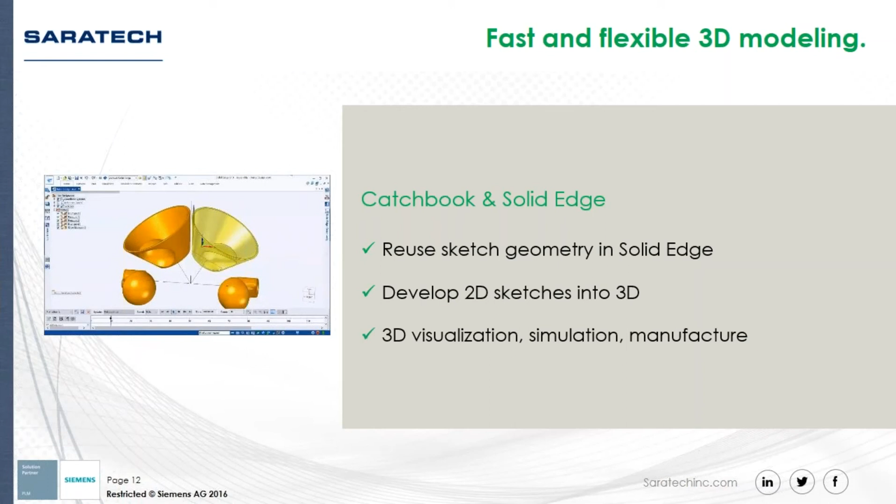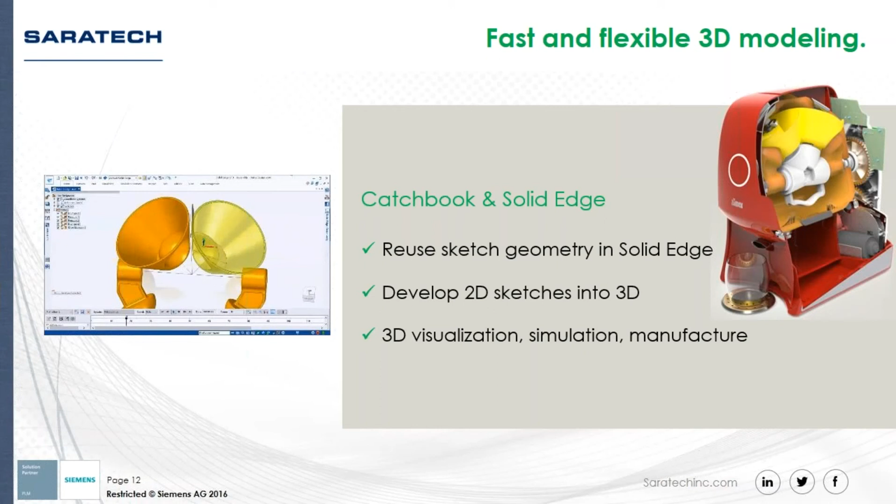So whether you're new to CAD or established, this is a great new way to let your company grow into things like 3D visualization, simulation, and manufacturing. And the finished product here, by the way, is the Soul Tabletop Juicer designed by Zumex. This new approach makes art and engineering design pretty easy and even fun.

Now let's move on to the unique power of Solid Edge Synchronous technology. You definitely should be familiar with it - it's a design approach that's all about combining the speed and simplicity of direct modeling with the flexibility and control of traditional history-based parametric design.

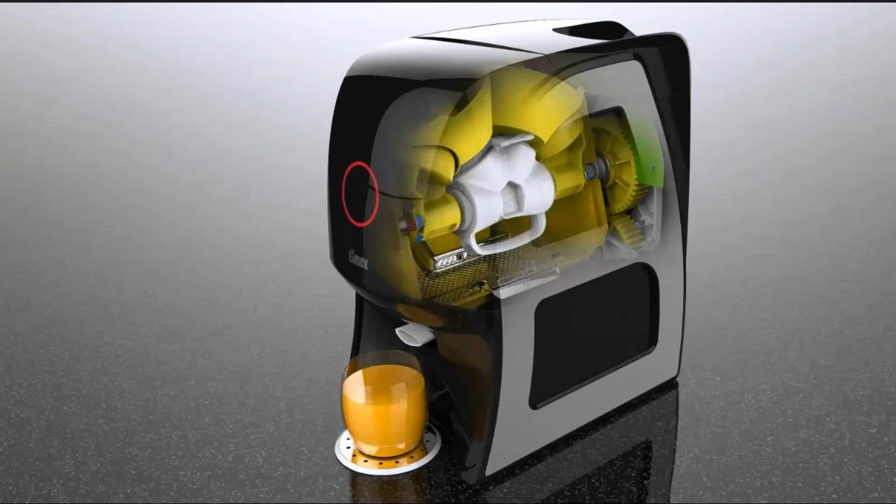Here we're going to work with this Zumex Soul Juicer to show off not just synchronous, but the ability to use both synchronous and ordered together for a hybrid design. Now here, this gear housing's handle was made as an ordered loft, but the mounts on each end were done as synchronous features.

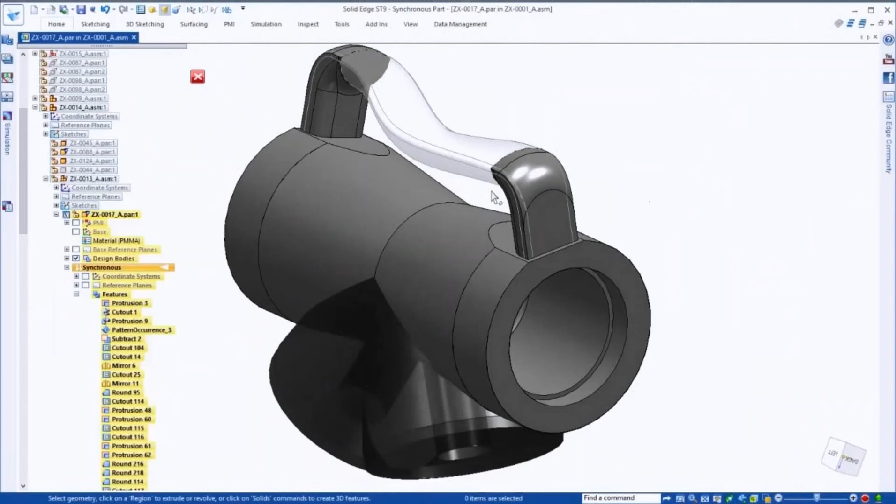So let's say we need to straighten out this handle. You can see it's a little bit crooked. So we'll change the synchronous mounts and see how the ordered handle reacts. Notice as we scroll back and see these synchronous features and modify them, we can still see the ordered loft in the middle in a ghost translucent mode.

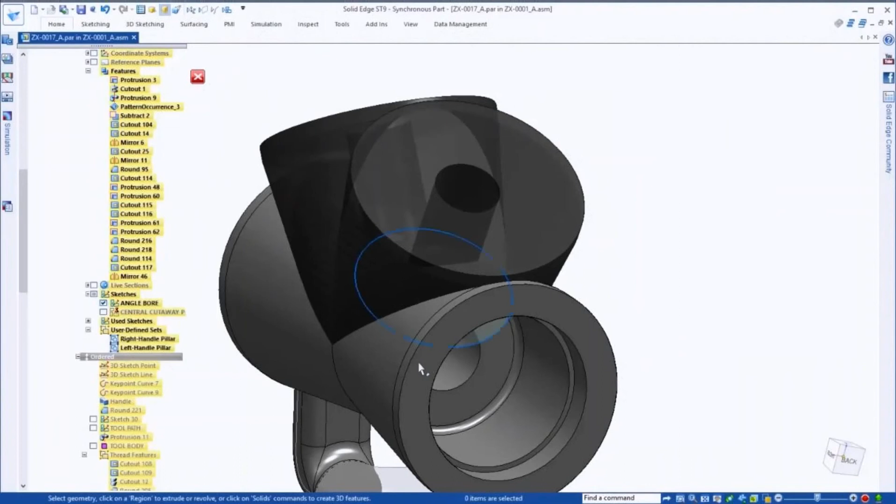This is a huge enhancement. There's no more flipping back and forth between the two modes and guessing on how the changes are going to look when you're done.

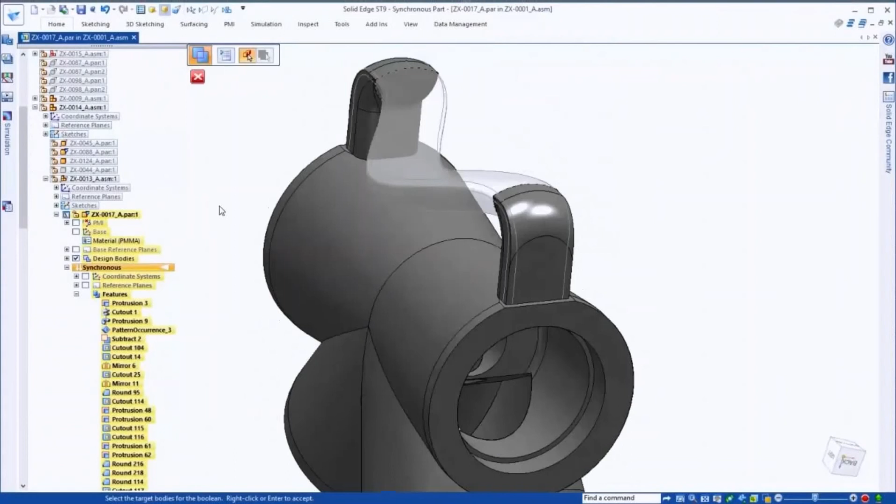Multi-body modeling is another powerful tool that's a lot better in ST9. With one step, you can add cuts to multiple design bodies, as you see here, whether they're active or inactive. And even if you go ahead and mirror these cut features, they actually remember what bodies to cut. This is really intuitive and smart and saves a lot of time.

Next, there's also a 3D sketch point that's been added. This was actually used in the lofted handle between the two end mounts, as you see. And we just aligned the two ends, but now we need to move that 3D sketch point exactly in the middle. So we just simply zero out the X and Y values to center that.

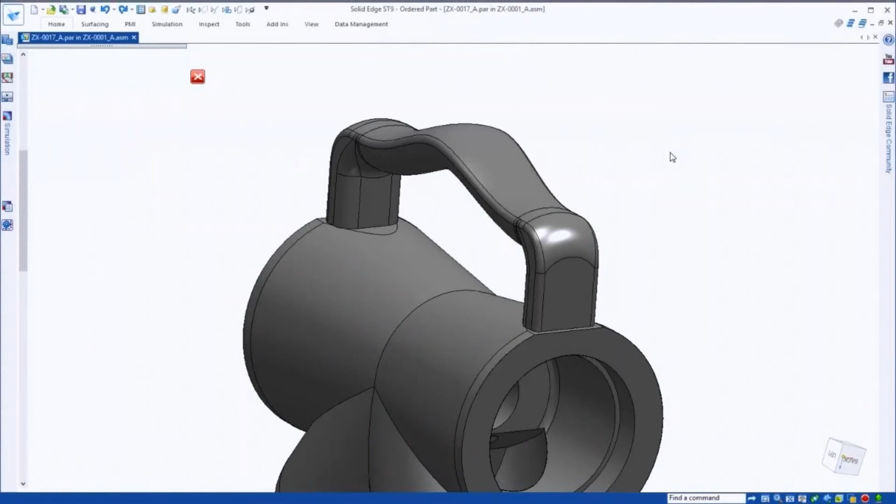And we can also increase the bow on the handle by just changing the Z value. Last thing here, we want to widen the center of the handle, so we can simply dynamically adjust that dimension. So you can really see the power that all this has with this hybrid approach of synchronous and ordered.

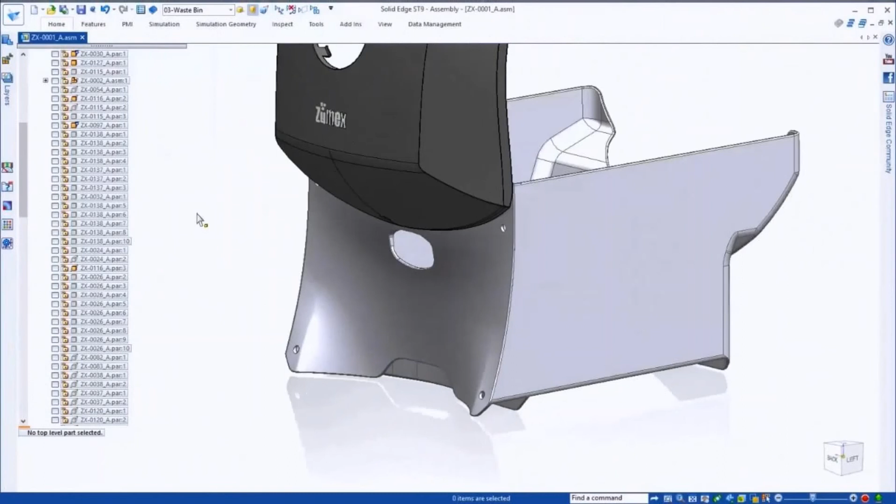Let's focus on another area of this juicer. The peels get dumped into a plastic bin here in the front of the body, but instead of this being a fancy, expensive material, we can actually just use a glossy plastic fascia for the front. Now this piece has to exactly match the bin's contour, right, and actually snap into the mounting holes. So how would you do this?

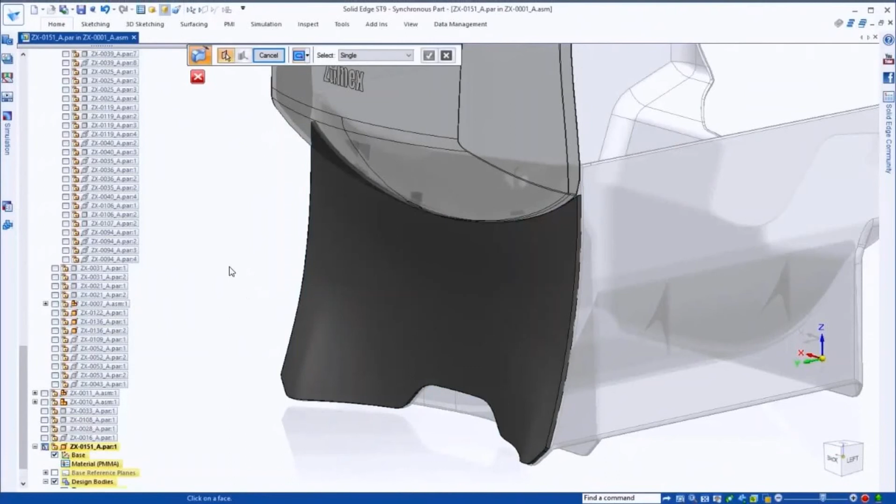In ST9, in the assembly, you can see we now have direct access to faces of other parts. So we can simply match that contour exactly by just thickening that front face.

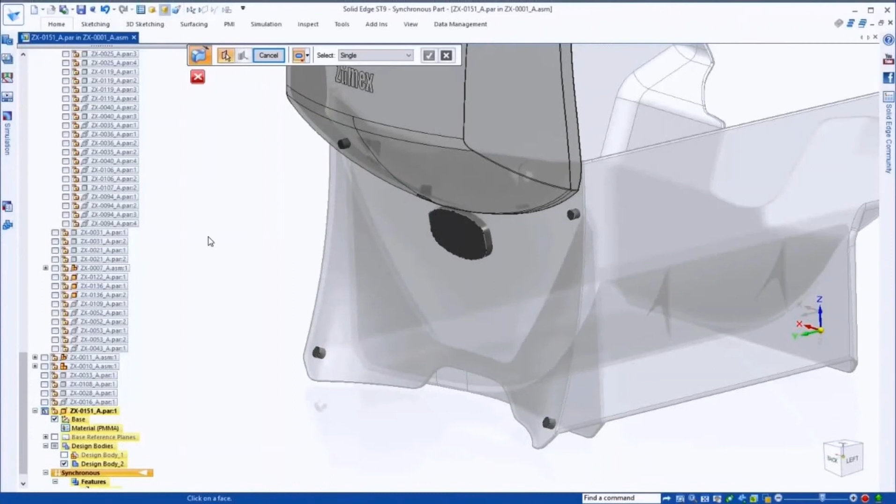So there's no more need for inter-part copies anymore. Just pick and go. Now let's finish up this fascia. We'll add these mounting pins. We can do that by creating a new design body for this fascia part, and then just use a Boolean operation to basically join or merge those two bodies into one single solid.

But hold on, this back piece over here for the spout needs to actually be cut. So how hard is this? Well, we can just drag the face right through the other side and you're done. That's synchronous for you.

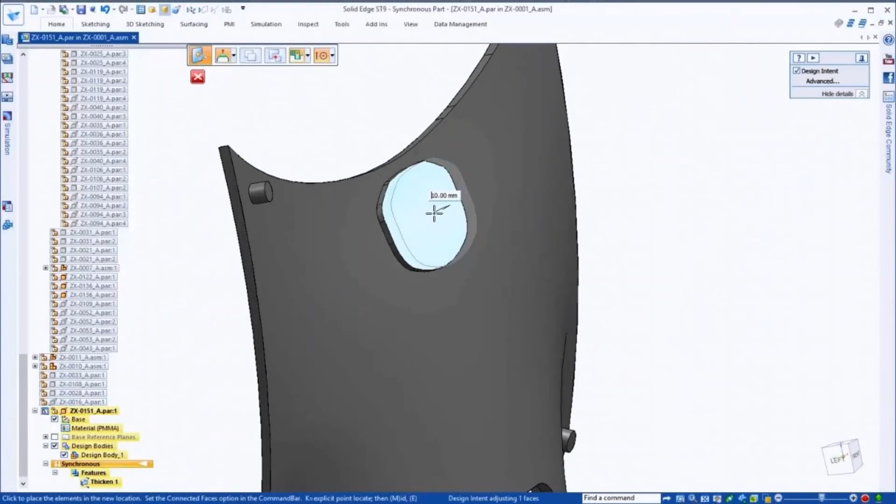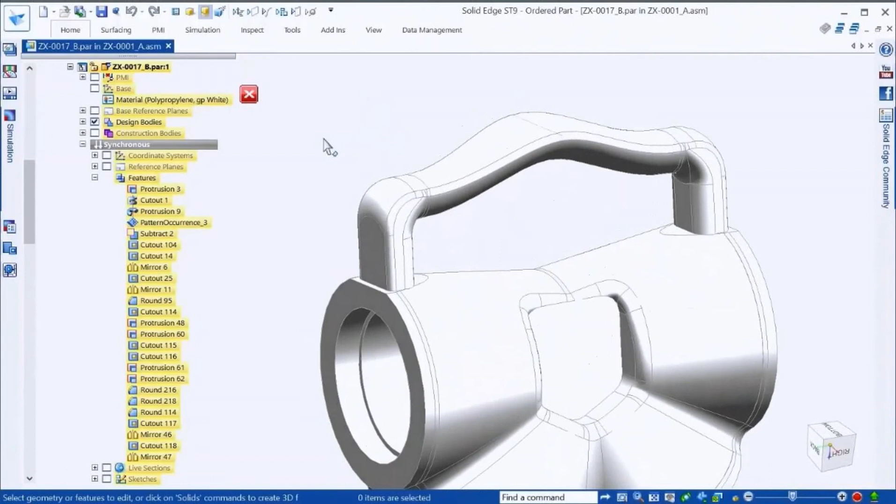Now let's take a look at the new solid sweep command that's been added in ST9. Now this juicer housing we were looking at before needs to be aesthetically pleasing, but it also needs to be functional. So we want to add a groove, for example, to this handle. You can add the solid sweep to add or remove material from features to get really complex designs like cutting guide slots or a drum style clamp cam or even simulating machining tools. So we'll cut out that groove by just sweeping the construction solid along that curved path, quick and easy.

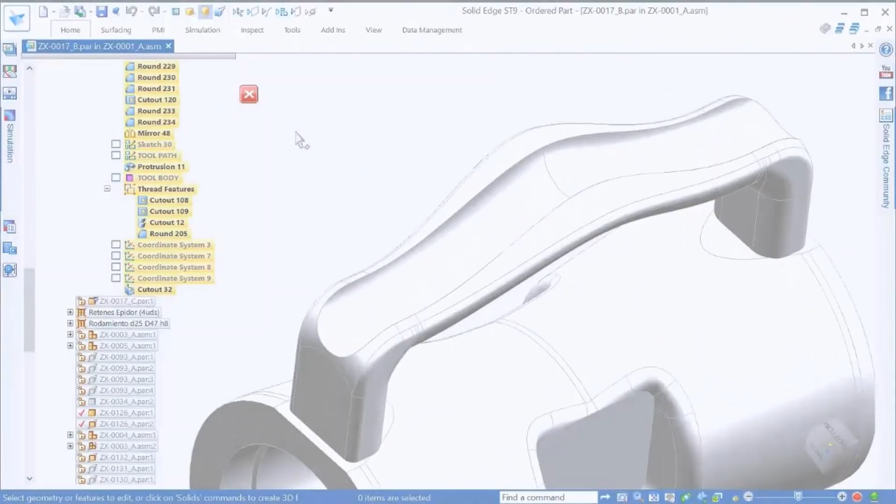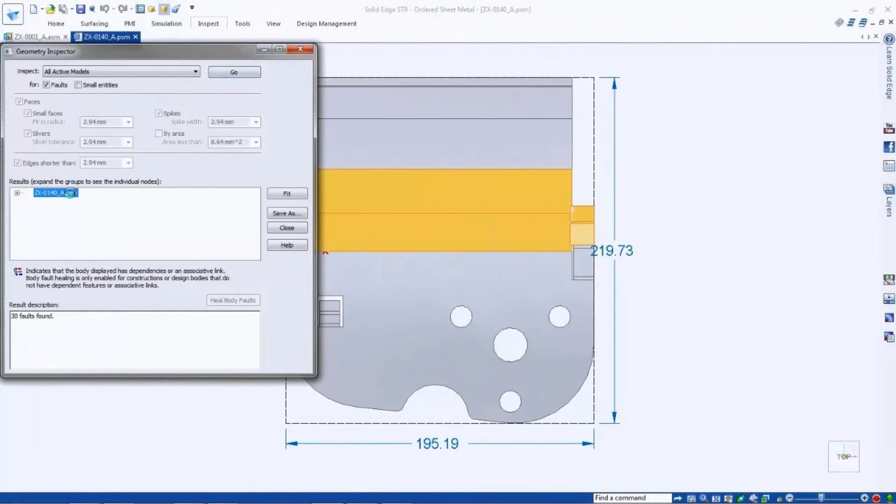All right, let's see the new clash detection tool for sheet metal problems, so you can catch issues before the manufacturing stage, so no one has to get yelled at so much. Here the heat shield was flattened, but you can see Solid Edge detected a clash. So some flanges are overlapping, so here we can now use Geometry Inspector to show us where exactly those flanges are bending across each other. So here we found the problem piece right here.

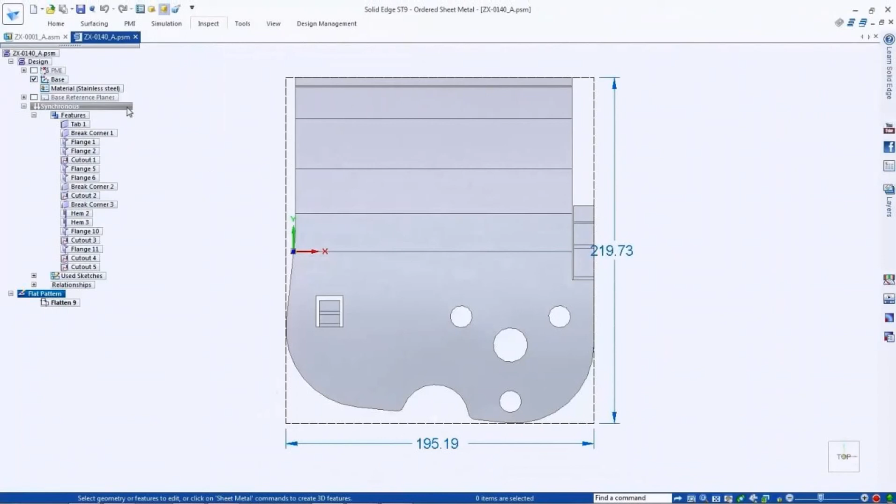And again, fixing this is ridiculously easy using synchronous technology. We just use the steering wheel, push it back, and get rid of that clash problem we had. So all in all, lots of new synchronous and other modeling enhancements in ST9 definitely make you and your job a lot easier.

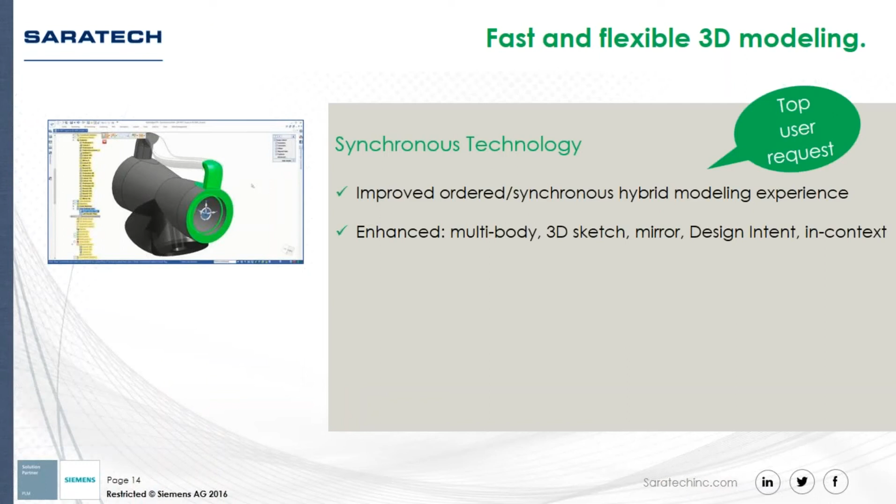Let's talk about even more enhancements though. We just saw the awesome new hybrid experience of combining history-based with synchronous. This was actually a top user request, probably by many of you. We also saw various other modeling enhancements like multi-body, 3D sketch, mirror, design intent, and in-context design. But there's a lot more that we didn't even see.

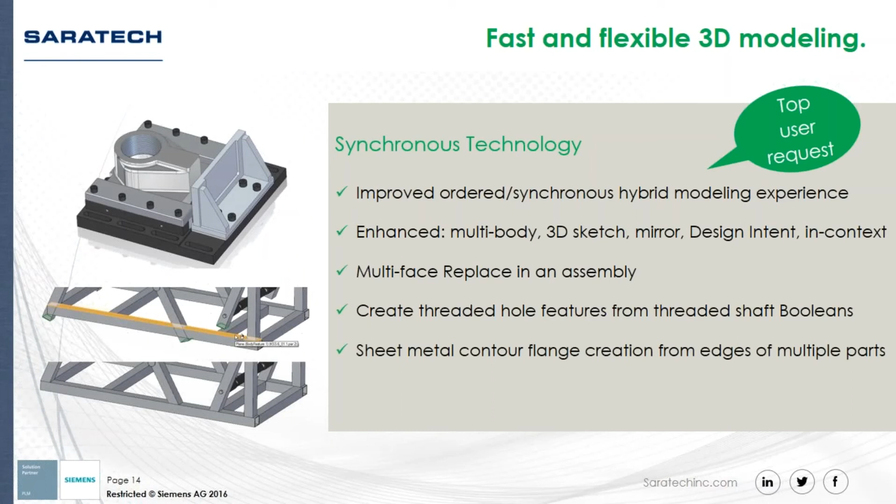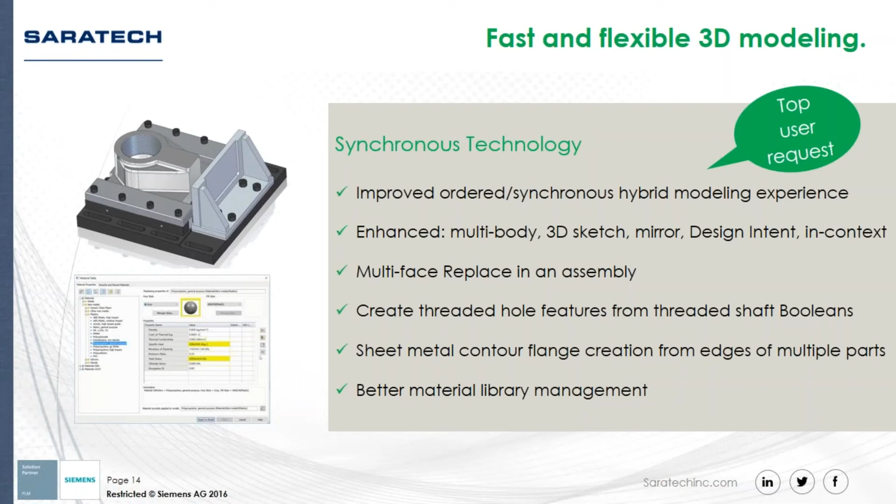Multiple faces can now be replaced in one shot. Hole features can be created from a boolean with a threaded shaft, for example, to cut out the holes for the bolts you see here. And also with synchronous sheet metal, you can now create contour flanges from the edges of multiple parts. And the material library is also much improved. It now has property validation and also some general organization improvements.

As I'm sure you're aware, the 3D printing world keeps growing, and not only for prototyping, but also for end product manufacturing, whether it's a plastic part for a hobby airplane or even 3D printed metal parts. I saw a titanium 3D printer a while ago. It was incredible. Now, we already know with Solid Edge we can design just about any part we'd like, but now ST9 makes it much easier to get these parts 3D printed.

For example, this part here should not be placed in a dishwasher, but instead of just printing that on with some red ink, we can actually design it into the part itself very easily by adding text and symbols as an emboss feature right onto the plastic. This is another nice enhancement in ST9, being able to pull block symbols right out of a draft file straight into our sketch.

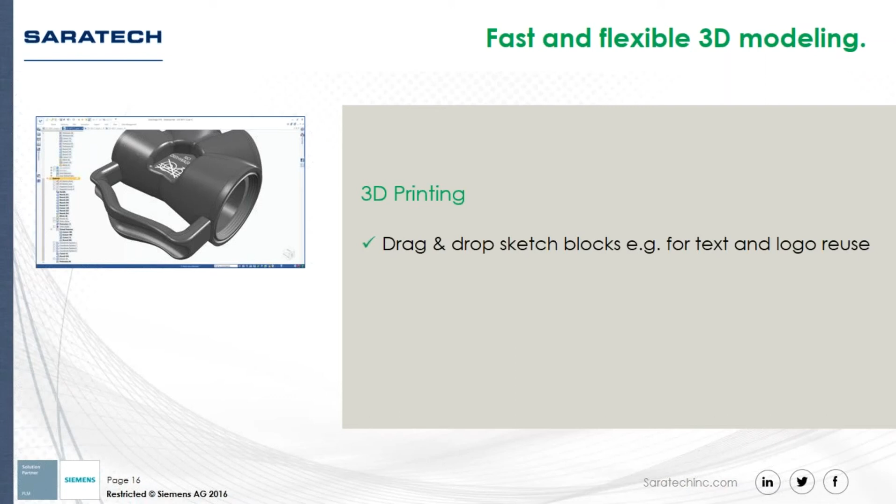ST9 makes 3D printing really a reality, whether you own a 3D printer or not. You can click to order your parts online right from Solid Edge. It even gives you a preview, which has tolerance control, before it sends it off to the Microsoft 3D Builder app. As you see here, this preview basically gives you a live look at the part.

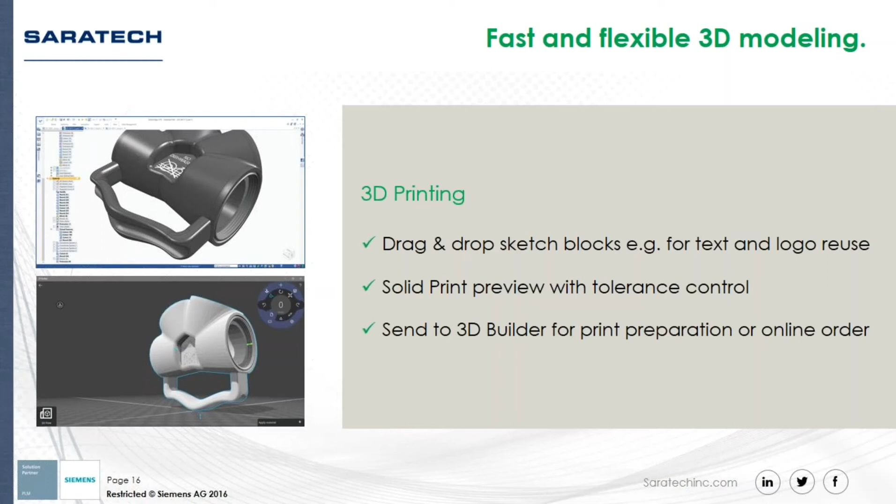You can spin it around and zoom. And this 3D Builder app is really awesome. You can virtually drop it on the table to see how it settles to print it in the best position. So keep in mind the beauty of all this is that in a matter of hours, or worst case a few days if you have to ship it, you can have the prototype or even the real part in your hands to see and touch. Nowadays it's super fast and economical to make prototypes to test for fit and function.

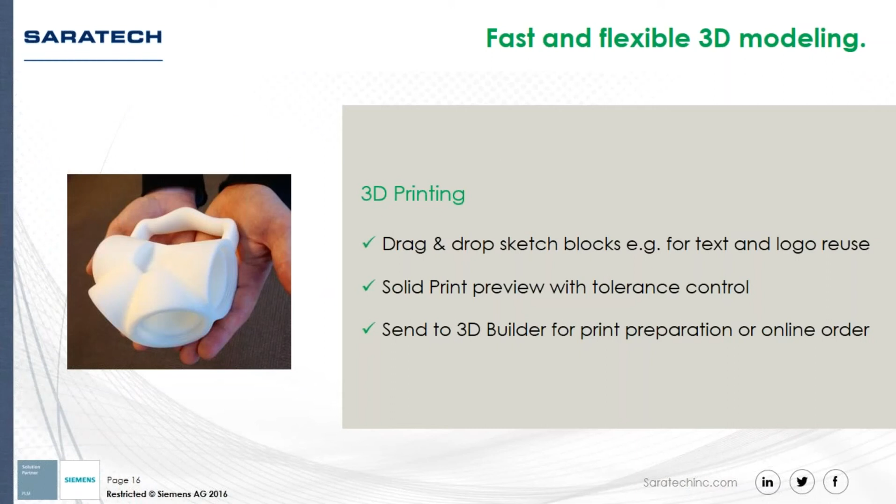All right, let's talk about model simplification. I'm sure most of you have some intense competition, right? Losing your proprietary designs can turn you from a market leader into a market follower.

The enclosure command in ST9 is quicker and easier to protect your trade secrets by simplifying out a lot of the details and parts and assemblies that you don't want to give out. But you can also use this for improving graphical performance on your machine, or even to make quick calculations of the amount of stock material that you'll need for machine parts.

You just pick the faces, and Solid Edge surrounds them with a cylinder or a box. Then back at the assembly level, you can display those components in the simplified form that you just made.

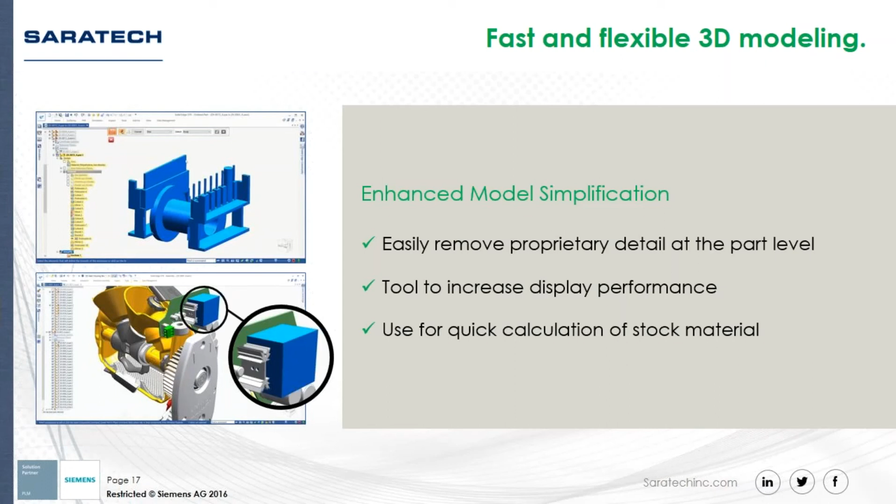Another area that ST9 has enhanced is the variable table. This lets you control all your model parameters with functions.

Looking at some of the new options across the top, the first button is List View, which is the default view we're used to. But in ST9, custom sorting has been added. Just like in Excel, you can now add multiple sorting fields, like first by name and then by type, which is much faster to find the variables you want.

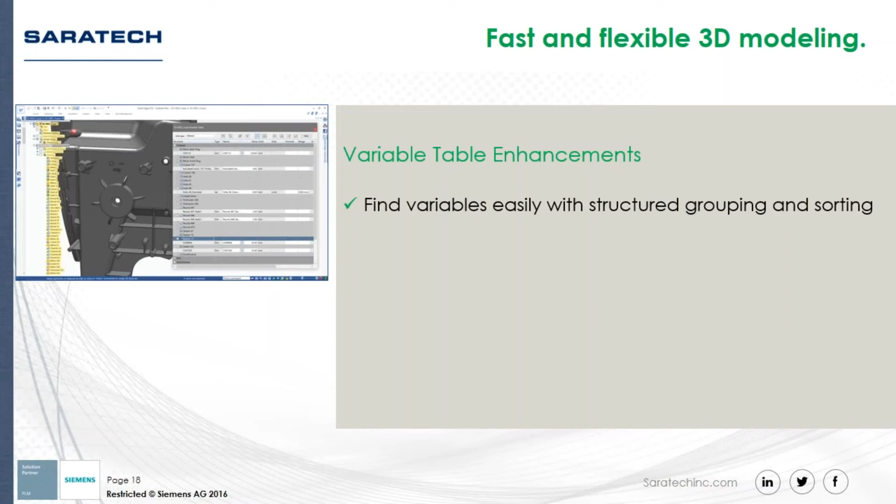Right next to that button is Structured View. This gives you a feature listing for the part you're looking at, basically like Pathfinder.

More functions and variables are available now, such as pi, which was a large customer request, but there's also if-then-else logic. For example, you can set up a logic function so that if the distance between the feet is greater than 230 millimeters, then another supporting foot is added.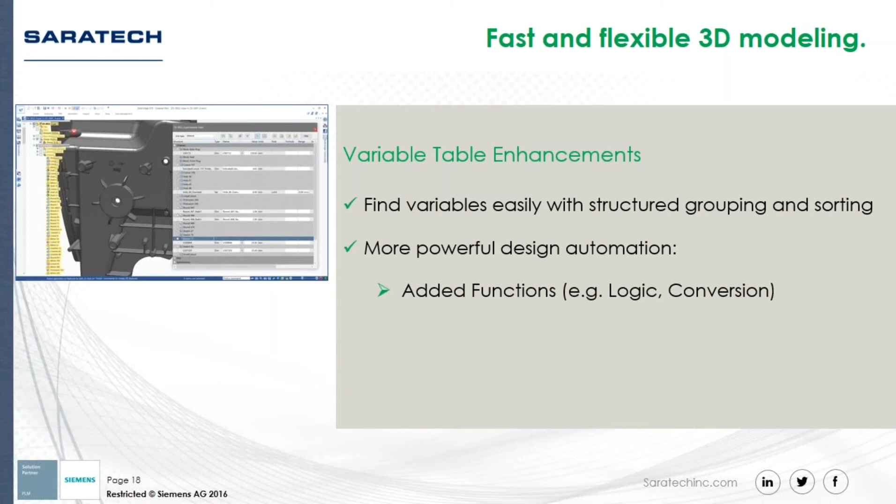There's also a function wizard, which gives you even more math, trig, and logical expressions. You can also do conversions, and there's better support for handling different units. The rule editor now has more capabilities for things like setting limits or ranges for dimensions. So this new variable table gives you much better control when adding automation to your designs.

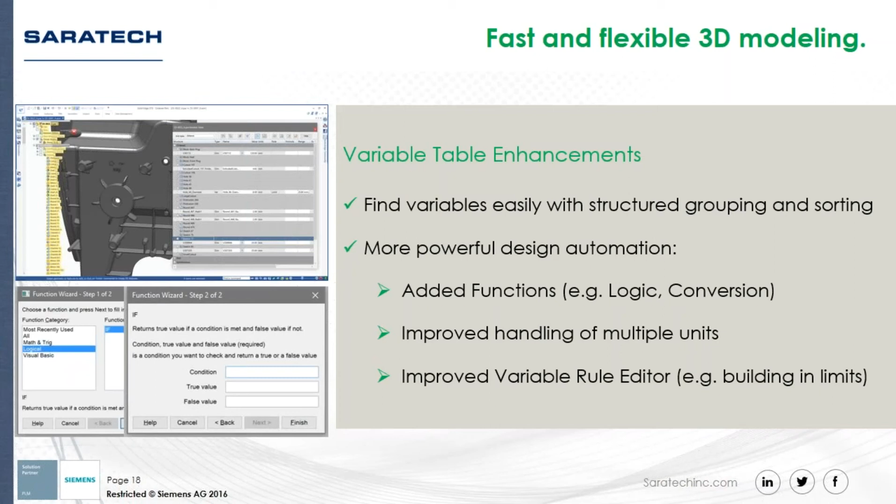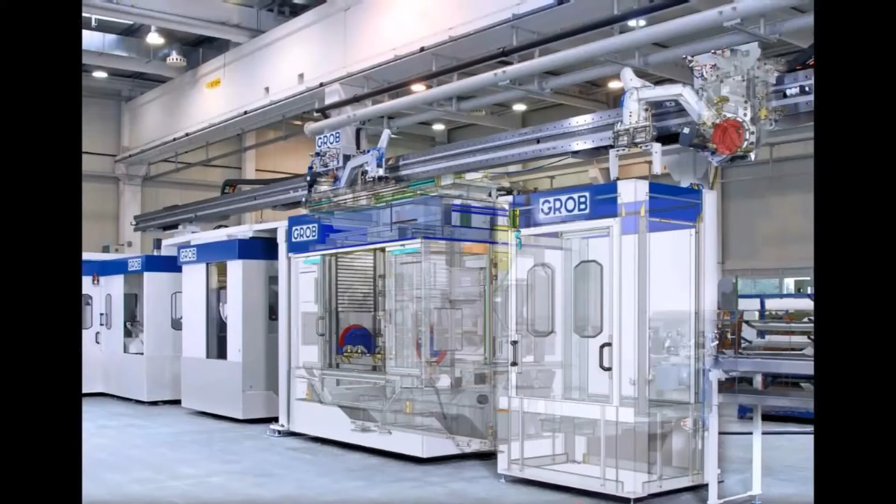All right, so let's jump in and take a look at even more new assembly features. Some of you work with very complex and crowded assemblies, so it's not easy seeing what's what all the time, especially with a lot of relationships involved. But ST9 brings lots of tools to get the job done faster.

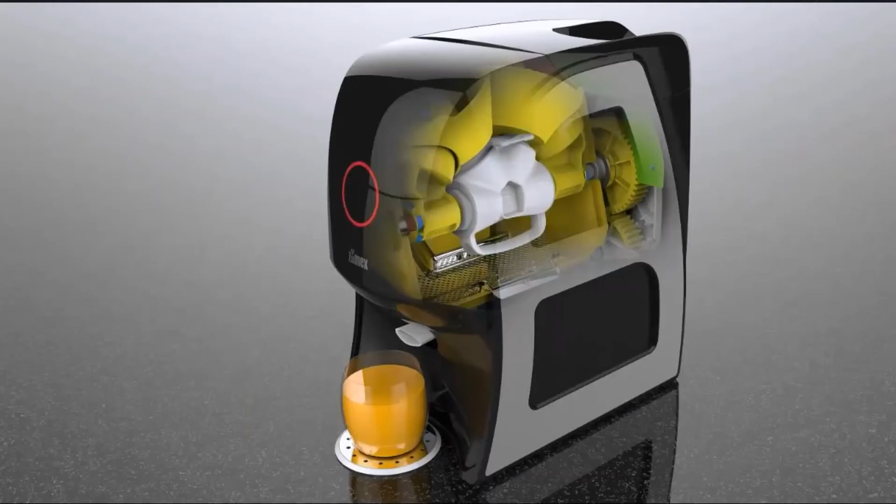Here we'll focus on a few systems of this Zumex Soul juicer again to show off some of these new exciting ST9 enhancements. Here you can see a rendered cutaway view. So first thing we'll do is open up the motor assembly.

Here we'll use the new graphic display toggle to basically declutter the display. Notice it makes all the surrounding bodies translucent, so we can zone in on the components we're actually trying to work on. Now this here is the Assembly Relationship Manager.

It's very intuitive, just like Pathfinder. It contains the entire assembly's relationships. You can use all kinds of different sorting methods and filters based on relationship type, any component name, and even status to work with all these relationships.

Notice we can filter for relationships with missing geometry. But the best part is you can fix out-of-date or broken relationships here too. So we can, for example, unsuppress this last relationship and rename the variable bearing offset.

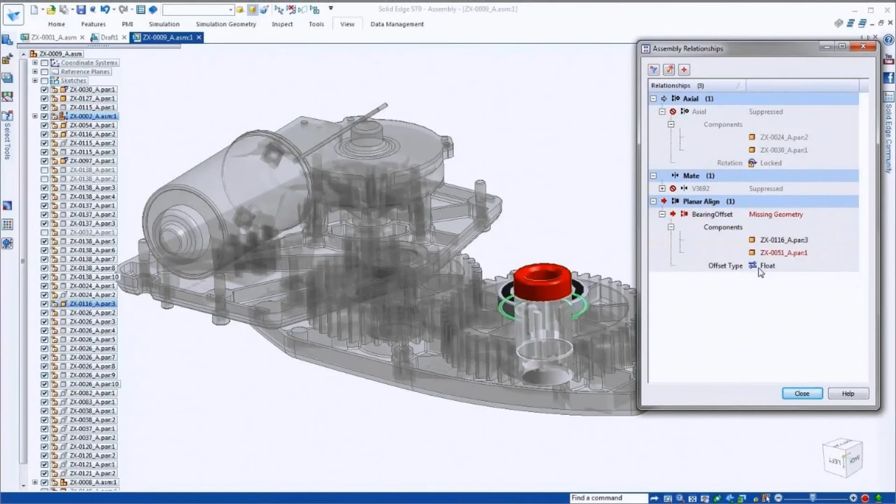Once we do that, we simply double-click it, and that puts us right into the relationship editor, where we can quickly fix the problem. In this case, rotating around and taking a look, we just need to pick a different face for this offset relationship that we had defined.

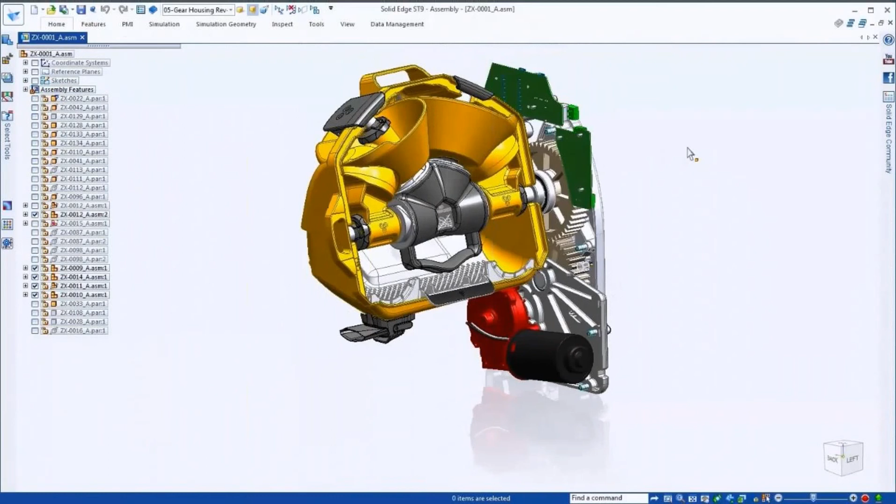Now let's use the new isolate display option to quickly focus on what we want next. With one click, this new toggle hides everything but this housing part that we want to look at here.

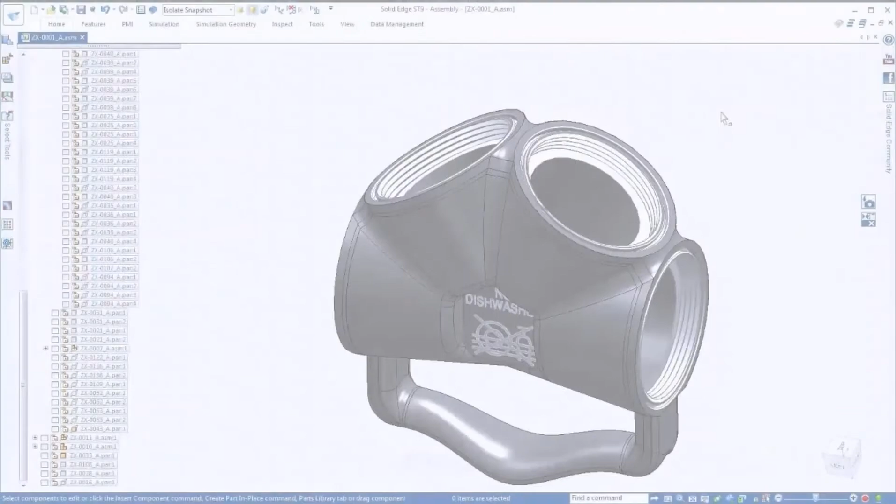Now once we in-place activate this part, notice this first bore already has a thread, but we need to duplicate that over to the other bores. So we just select the thread feature and use duplicate to copy those threads to the other bores using the coordinate systems, which is very easy. And to get out, we just click the restore button.

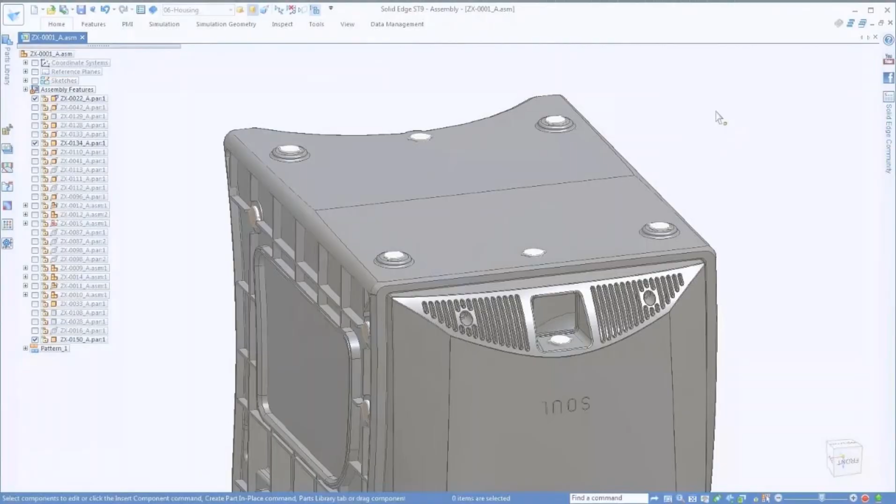Now back at the assembly level, remember I mentioned the duplicate command now allows block sketches from parts. So let's duplicate this footpad part across the top and front housing pieces by just using the same sketches that we used to create the features at the part level. This is awesome. We're no longer limited to patterning on a single plane.

Let's make one more change here. We can see this hole is a little too close to the edge, so we'll change this location, which is at the part level, and immediately see the pad update at the top level assembly. So very easy in-context design.

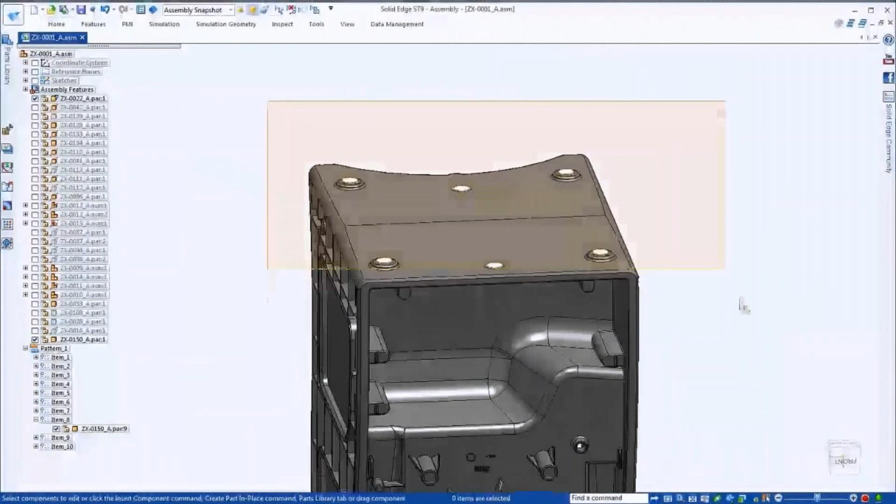Now, just because a component is duplicated in an assembly doesn't mean it's always going to have the same function in all the places. So in ST9, you can have unique properties of each occurrence using non-graphic data, so things like notes, assembly instructions, or even maintenance procedures. Here we duplicated that single pad part across different locations, but each occurrence has a different purpose. So let's enter in some custom information here.

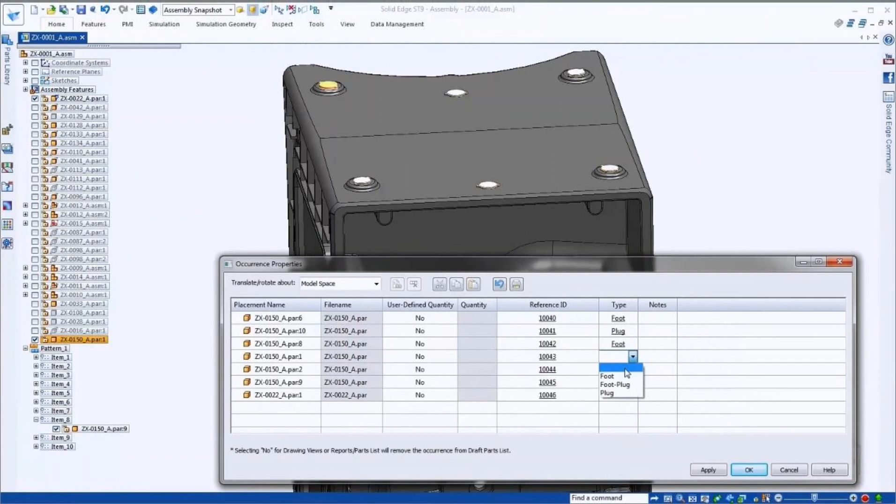to the occurrence properties. In this case, reference ID and type are what designate each occurrence's category as either a foot pad, a foot plug, or a plug. Notice also the notes property here lets you add any other information like assembly instructions or any custom properties too. And another big benefit here is you can create and save custom queries for this.

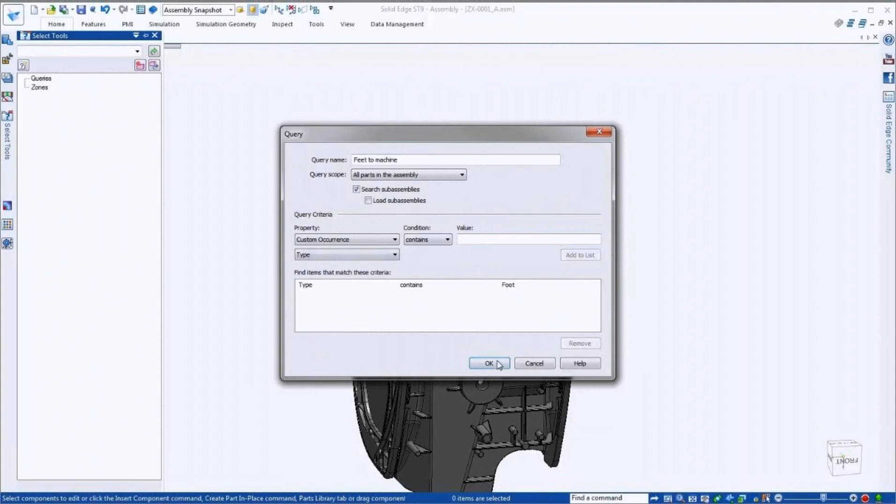This makes it really easy to search for specific components you want. You can pick any of the properties you defined, like type in this case. And once that query is set up, you just double click it and those components are shown right away. So very, very easy.

But we can't forget about drawings, right? So let's go ahead and create a new drawing from this part, and we'll create or place a saved view onto the drawing sheet.

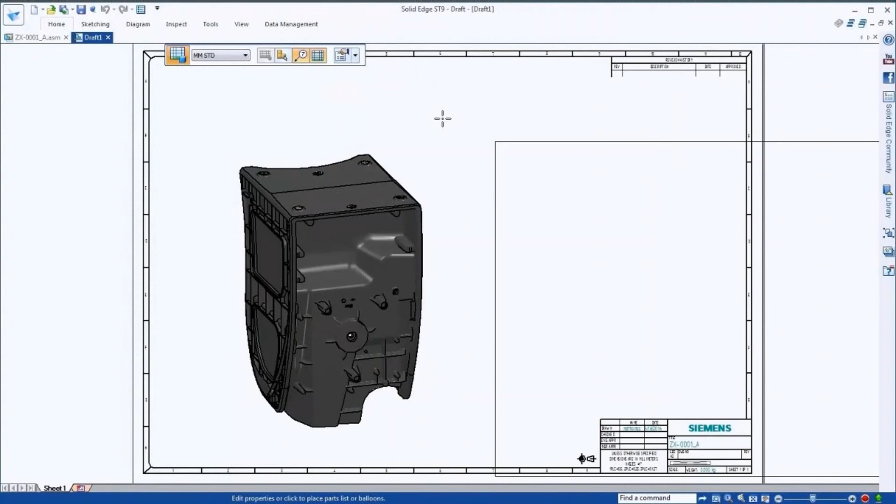And now we'll add in a parts list. As you see here, it actually includes these custom properties that we defined specific to each occurrence of those parts. So notice the parts list here shows each of the 6 occurrences, each one having its own reference ID and type.

And it's often these little things in life that make the difference. Here, customer Bird Technologies, who pride themselves on designing the world's most reliable radio frequency products, they're really loving that new Isolate display tool.

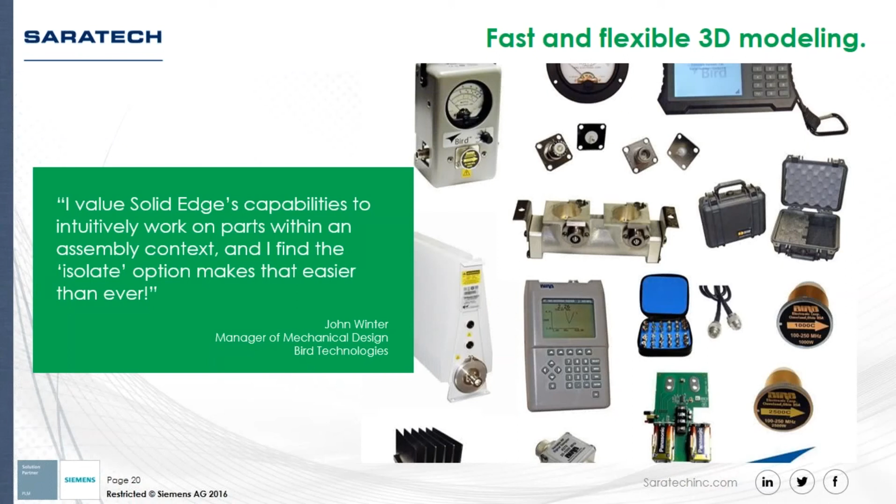Drawings are still king though, and Solid Edge is still the king of drawings. Let's see what ST9 brings us for drawings.

When you create drawings of long parts like this shaft, showing the break lines precisely is very important, right? ST9 brings key point snap capability, so you can build in associativity to the model geometry, so any changes you make are going to be automatically updated in all those drawing views.

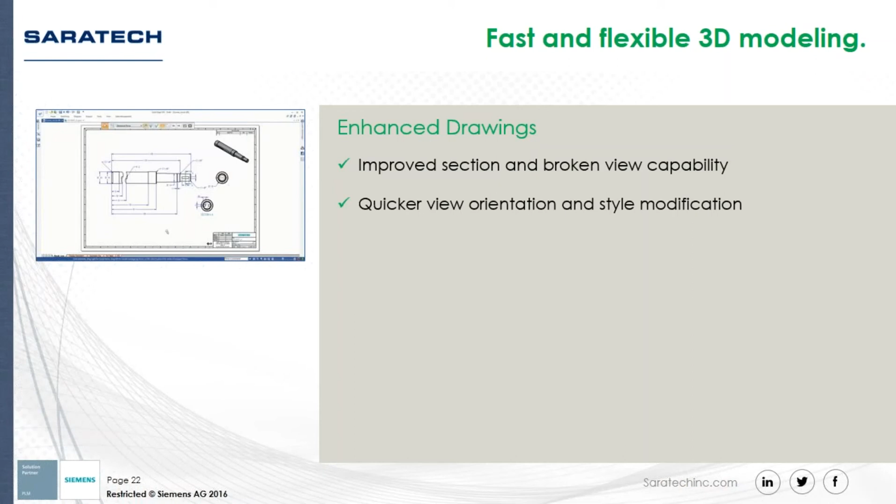Now, let's say you place some views of a part and they're full of hidden lines. Ugly, right? Well, now in ST9 you can simply select multiple views and turn off the hidden lines for all those views in one shot. You can even change the view orientations after you place them, and of course, all of the dependent views also update based on their projection angle.

Symmetric diameters have also been improved. The text position automatically alternates and the dimensions are grouped together.

There's a new tolerance table, so if you have a drawing with a bunch of dimensions with fit class tolerances, this table automatically populates all those standard tolerances for the letter class fits, which can be very, very time consuming, so you won't have to reference that engineering handbook so much now.

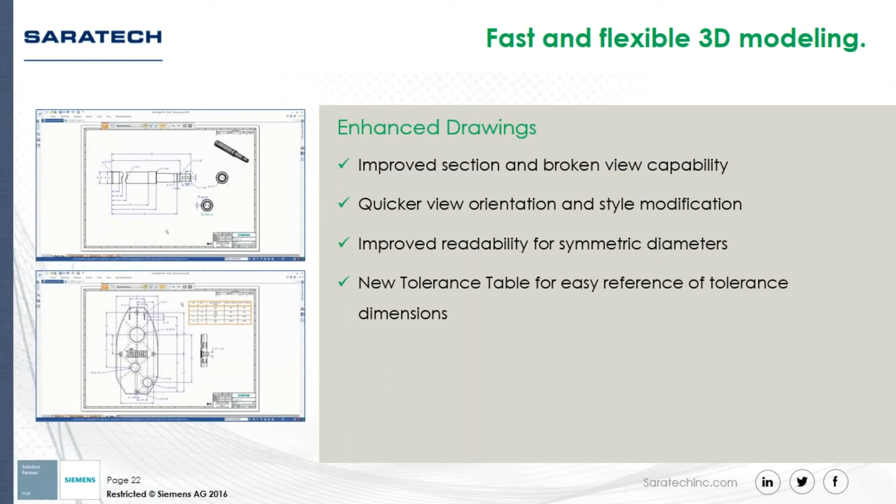Another enhanced feature is paper print, so you can now get a large preview area for each drawing sheet, and you can zoom and pan around each sheet and even print a specific area of the sheets.

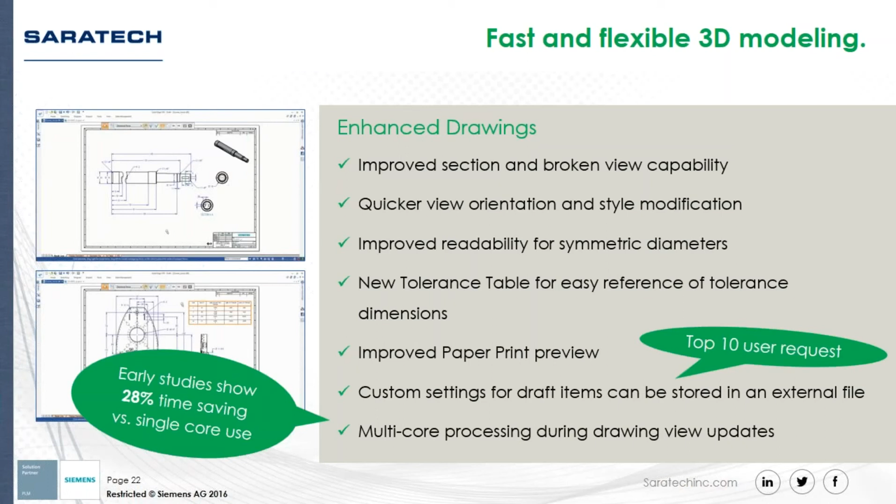Another top 10 user request here, draft settings can now be stored in an external file, so you can easily administer many machines. And finally, multi-core processing for drawing view updates. This is awesome, this is going to be a huge time saver. Initial studies are showing about 28% time saving.

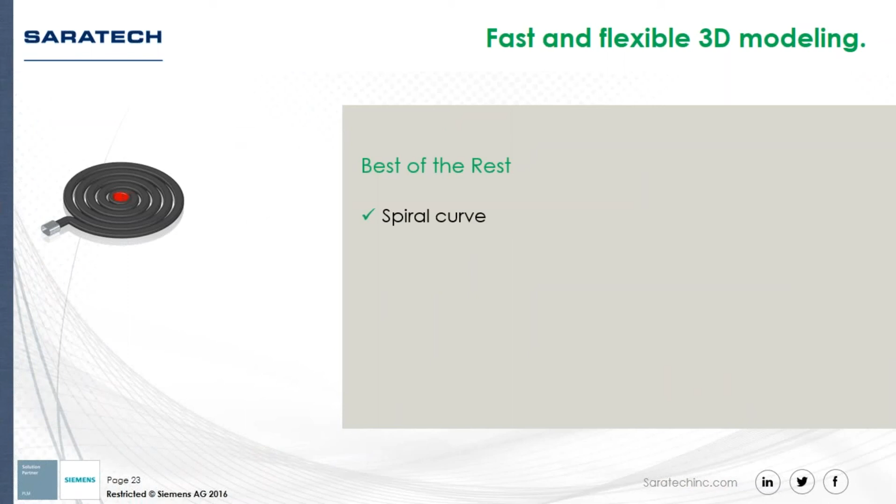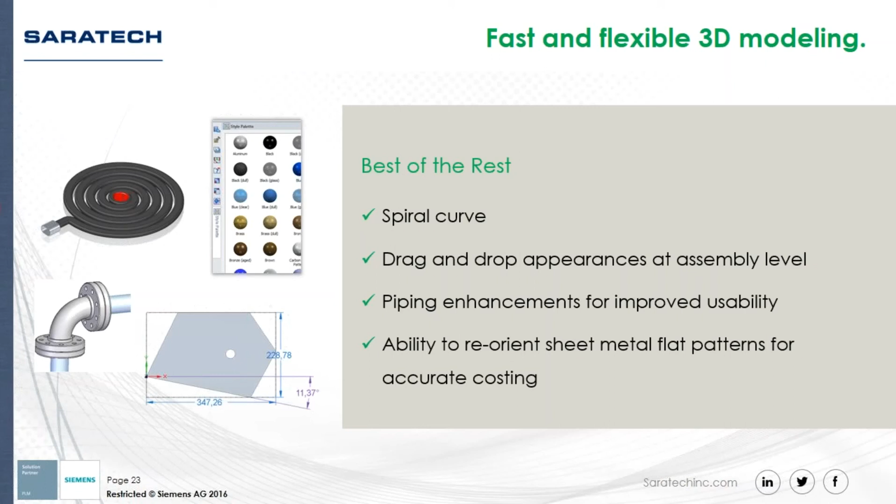Remember, we can only cover so much of what's new here, so let's talk about just a few more of the top modeling enhancements. Spiral curve, drag and drop appearances at the assembly level, which has a much better preview too. The piping environment is much improved, and the ability to reorient sheet metal flat patterns to give you much more accurate costing are just a few of the top ones.

Now, beyond modeling, design work for a lot of industries and applications should definitely be incorporating simulation. In ST9, meshing performance has improved a ton. Initial studies are showing about 4 times time saving.

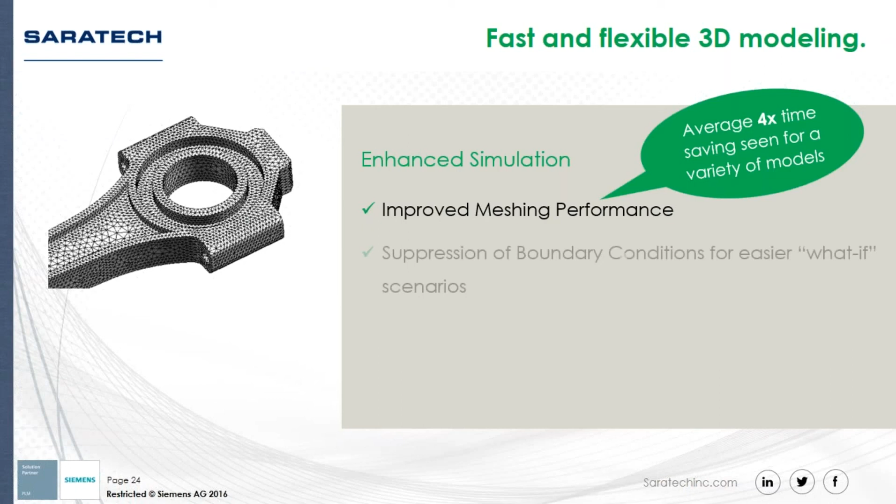Boundary conditions can now be suppressed, so you can do what-if scenarios a lot easier. And there's also now an option to maximize quad elements over tris, which gives you much nicer rectangular surface meshes.

If your team isn't doing any simulation, or if you are with another program, I highly suggest you reach out to us about Solid Edge simulation. It's really a huge bargain because you're getting industry-leading FEMAP and NX Nastran technology from Siemens in here. And having simulation with your design process can really save your company a ton of time and money.

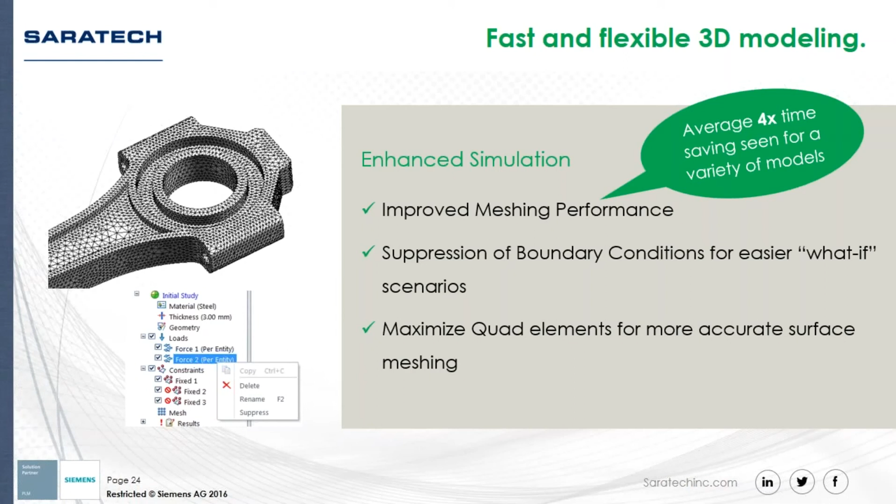We covered additive manufacturing with 3D printing before, but of course we can't forget about good old subtractive manufacturing, right? CAMWorks, which is Solid Edge's best embedded CAM solution, brings lots of new enhancements. Let's just see a few.

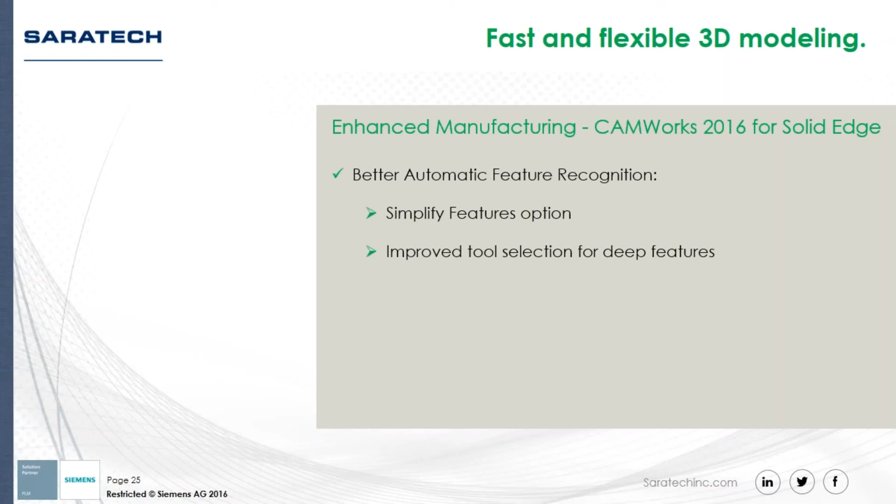Automatic feature recognition has been improved, with a new Simplify Features option. What this does is break prismatic features apart for more efficient machining. You can now allow longer tools to be substituted after a short tool reaches its limit for deep features. Default strategies can be edited directly from the CAM interface. There's a new volume mill pre-drilling option, which eliminates the need for expensive center cutting end mills.

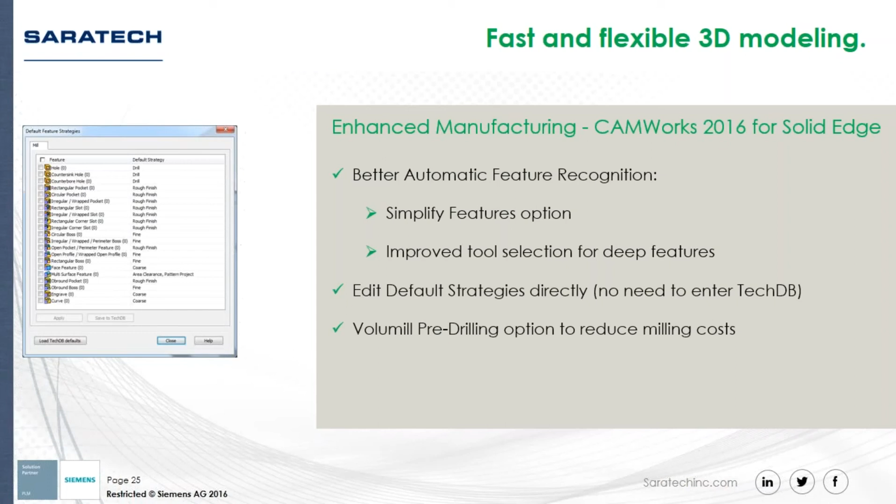There's a new gun drilling cycle that lets you machine very, very deep holes of more than 10:1 length to diameter ratio. And the tool management tree has been added to the PathFinder.

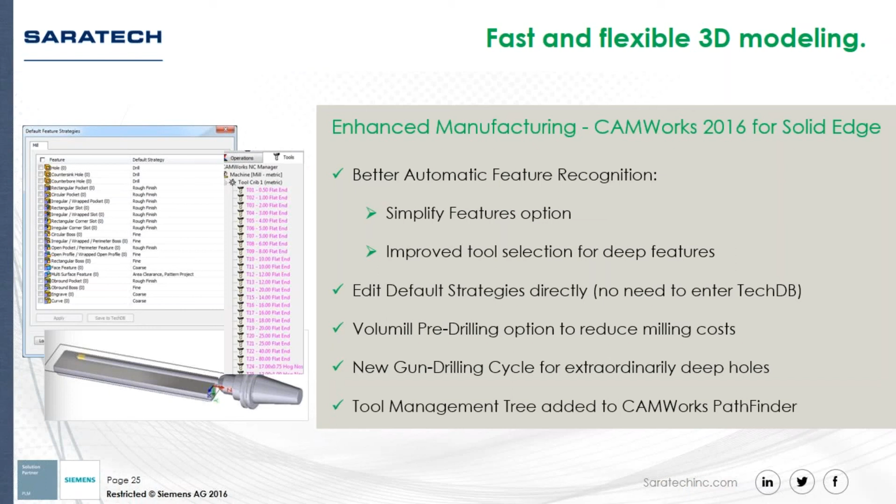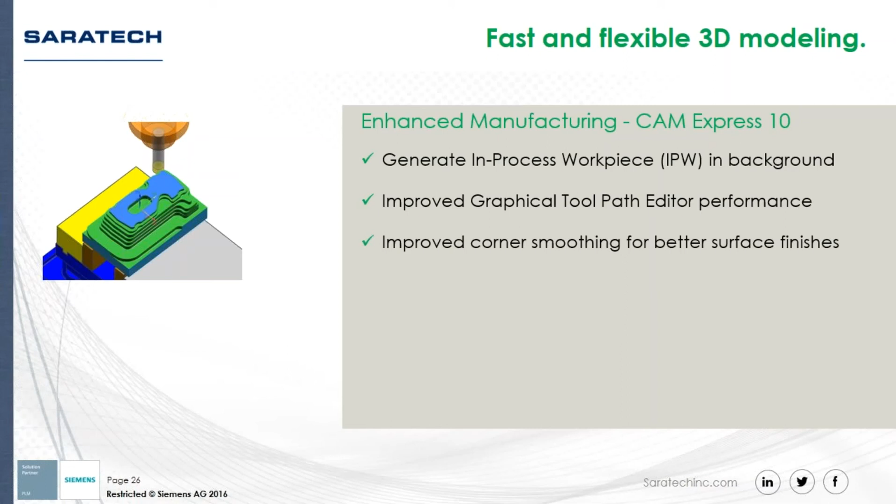Now, the other leading CAM solution is CAM Express, which has also been improved, of course. In-process workpiece can be generated in the background, so you can work on other parts while that one calculates. The graphical toolpath editor has been improved, so you can relink toolpaths that have had some portion cut away from it.

Corner smoothing for Z-level and flow cut operations are improved, giving you much better surface finishes. There's an automatic cut pattern direction option for follow periphery, which means the path automatically switches from inward to outward or vice versa, depending on which option gives you a better job for that cut level.

Floor wall operations are much faster now, and there's also new boss milling and thread milling options, and also chamfers for holes.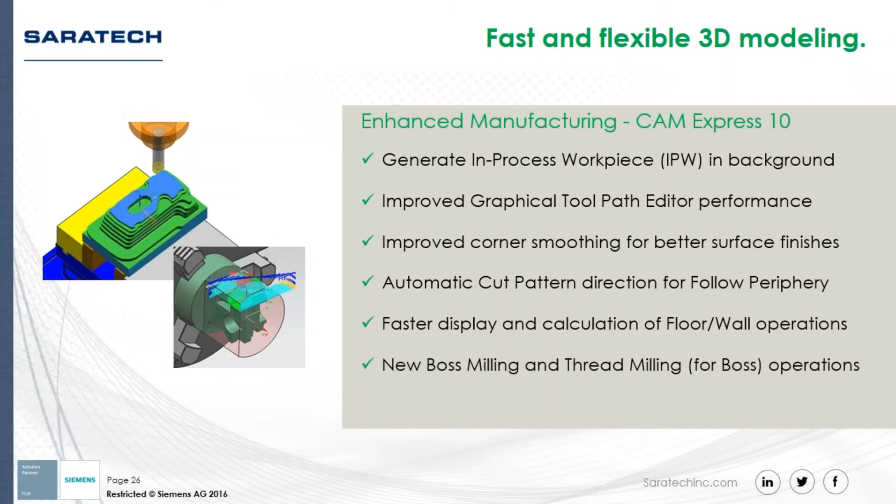All right, let's talk about a very important topic, PDM, or Product Data Management. You really need to get with this if you're not managing your data. How do you like the sound of instantaneous searches, easy revisions, easy release management, and even optional cloud-based vaulting? This is all available for all levels of Solid Edge: design and drafting, foundation, classic, and premium. So let's take a look.

This demo is going to focus on these new built-in data management capabilities in ST9, which of course help you manage your fast-growing amounts of data. To make your everyday tasks much easier, there are lots of new features like unique document numbers, instant searches, easy revision, and release management.

You can actually perform very fast searches directly from Windows Explorer. You can filter your data by file name or standard or even custom properties, so you don't have to waste time opening different files to try and find what you're looking for. We can search on the title property, for example, first for motors here, then for juicers. And there's also preview graphics as well.

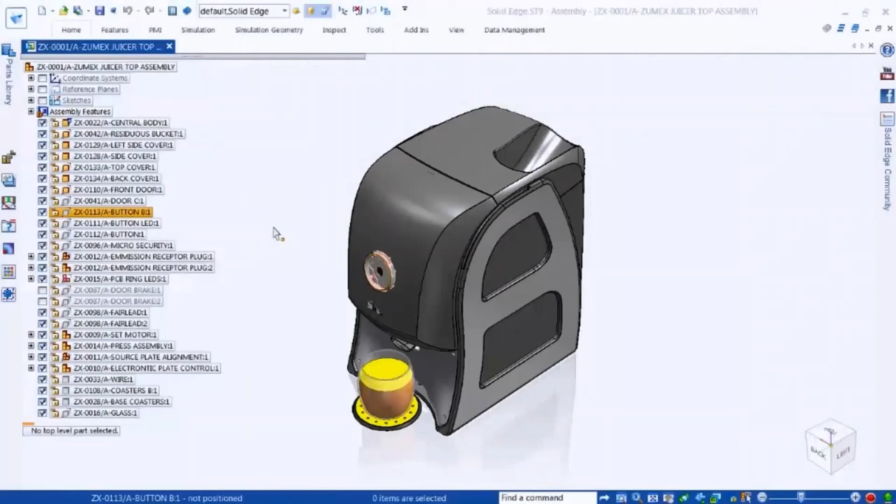So opening this assembly in the Design Manager utility, by the way, this is what's replacing the Revision Manager, for those of you familiar with that. Here we can review and edit property data, rename files, create revisions, and release documents too. And notice how quickly we can open Solid Edge since it's tightly integrated.

Now we know we need to modify a part and also fix a clearance issue on the housing. So this is a vendor part actually. What we want to do here is check the folders where we have saved documents and see if we can find an alternative component.

Instead of looking through all those files for that vendor, we can just apply another filter. So we can add the title property to search, and then we can even add the word plug to that search.

Typing that in, notice all of our search results get trimmed down a lot, and we can select the individual results and see a preview of those too.

But let's say that none of those meet our needs, so what we want to do now is create a new plug altogether. And with this new tool, file names for new documents are assigned automatically for you. So let's take advantage of this and replace the plug with the new one.

So we type in the document number here, and notice the file name is automatically created. We can give a new title for the document, of course. Now clicking Save gives you an error actually.

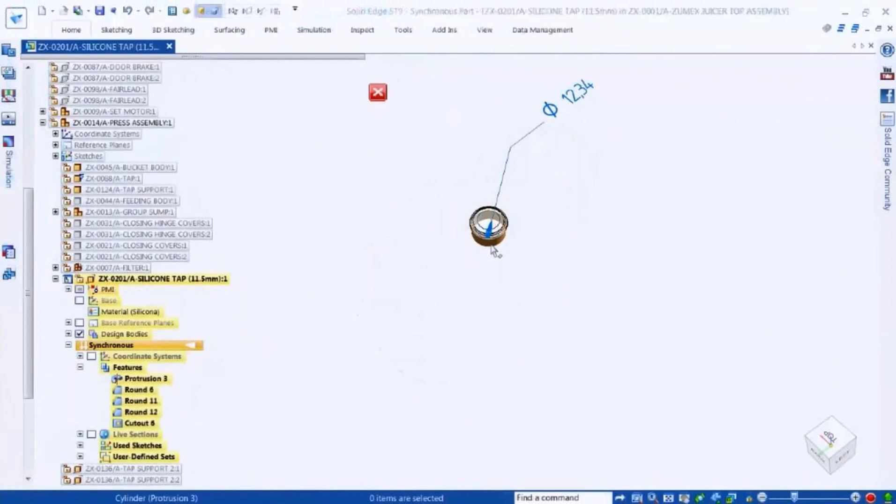It's telling us here that the document number is already being used. Notice these built-in data management capabilities are really making sure you're not going to have any ugly problems down the road. So now with the new part, we can just change the dimension with Synchronous and fix that issue.

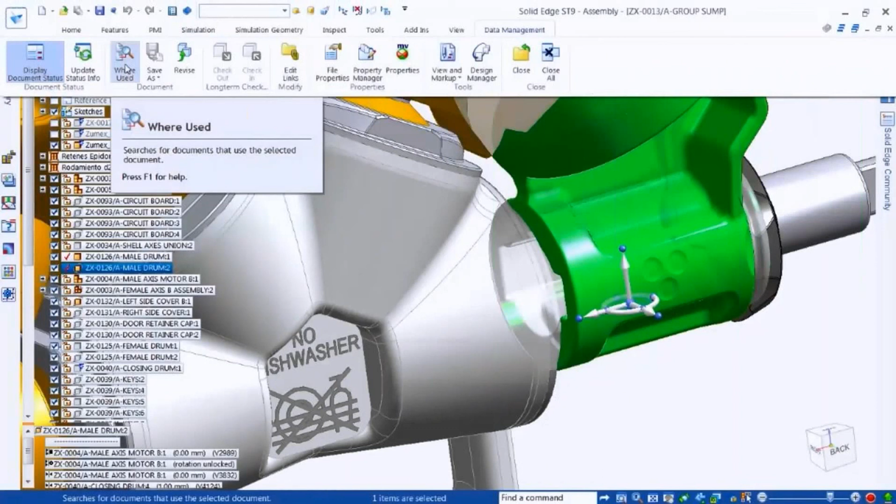Now let's take a look at this housing again. We want to make another change to this housing, but notice we get another warning message. Solid Edge is telling us that this part has already been released, so we can't edit it, of course. So what we want to do is create a new revision.

First, we need to figure out if this is used in any other assemblies, though. So we can use the Where Used tool here to find all the other documents that have some link to this part. As you can see, the searches are very fast, but the only other part is a drawing.

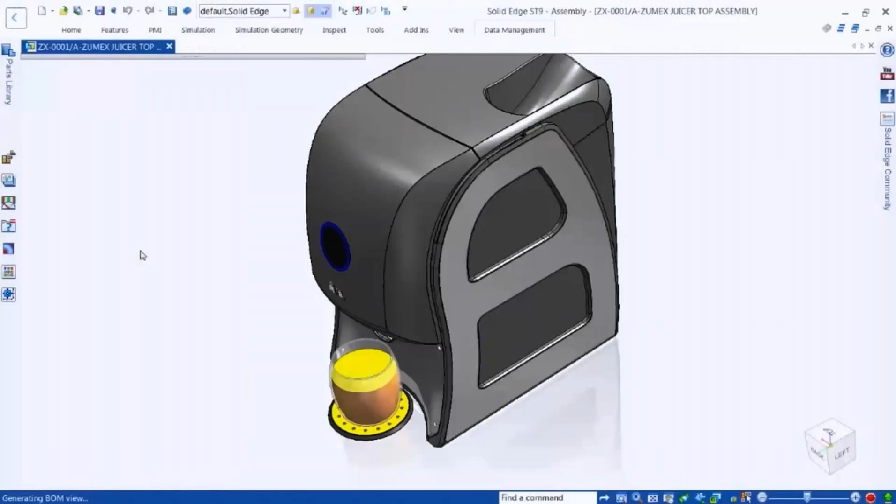You can set the character to whatever company standard you use. In this case, we'll just change from A to B. And one thing that's critical to note here is the associated draft file is automatically revised too.

The next new awesome tool is Pack and Go. This lets you pack up your design to send to a supplier or a customer, for example, for a review or something. You can include your drawings and simulation as well.

And we talked a little bit about this before, but we can now use cloud services like Dropbox or OneDrive to share our files. Now, don't worry, all of this can still work with your existing local and network infrastructure. But in this example, we'll just drag the new zip file into Dropbox, so now it's saved securely on the cloud and readily available for sharing with anybody, basically.

And if you're working with a distributed design team, you can copy the Solid Edge files for an entire design project into Dropbox. And like I said before, it does have a locking mechanism that makes sure there's no accidental bumping heads when you're working with your files.

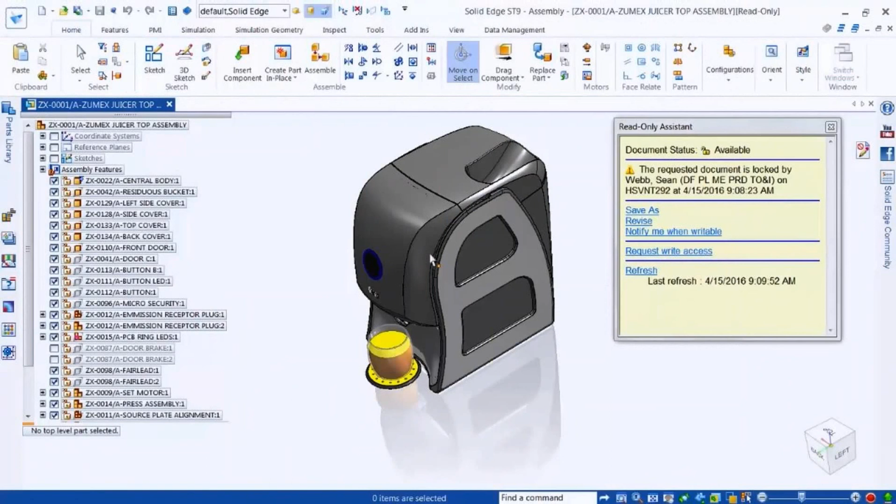As you can see, users are informed who else is currently working on a file that you open, so you can't overwrite somebody else's work. So hopefully this will reduce some of the bickering across cubicles.

So lots of data management capability out of the box with ST9 now, but more importantly, no need for additional IT resources. There's no SQL, no databases, and it all lets you get a much better control of your data and speed up the everyday design task.

So all these new tools really give a lot of value, especially when you use them with other tools like View and Markup and the mobile viewers. But if your needs grow, the beauty is that once you have this set up, everything will be organized so you can grow into full product lifecycle management.

And this is where Teamcenter steps in, the industry standard in PLM. And ST9 brings lots of new enhancements to this as well.

Active Workspace is all about streamlined access to product and process data. And it's now embedded directly in Solid Edge. That's big news. There's a dedicated ribbon bar with all the tools for easier tasks like searching and filtering.

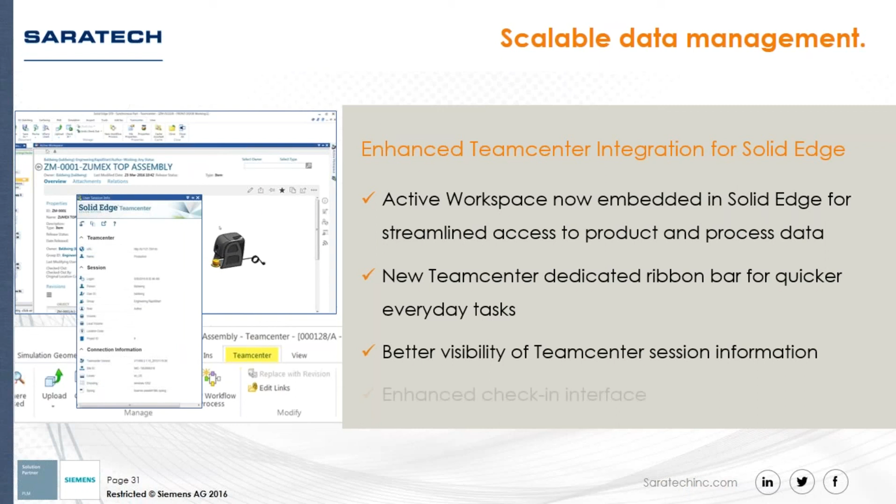And also new workflows can be initiated right from Solid Edge, so you don't have to work in a separate window.

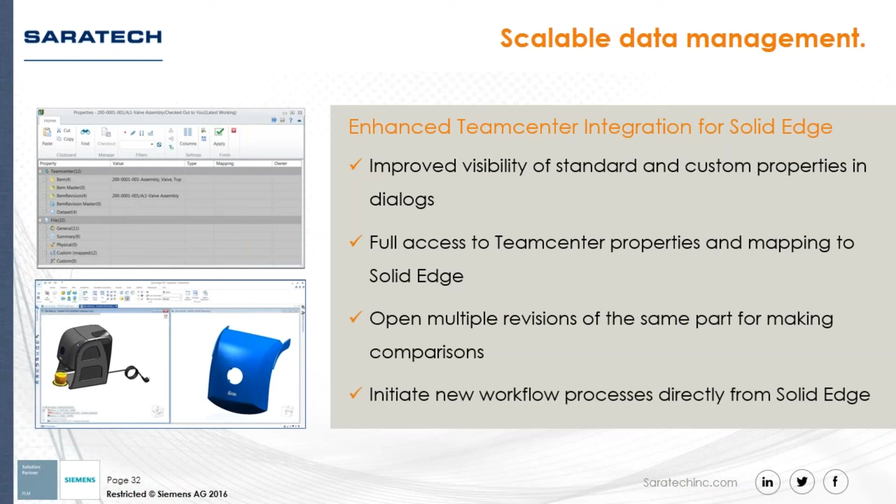Also, the cache assistant lets us see what files we have in our local storage. And there's a new create package like we saw before.

Now, if you're thinking that your company already requires this type of data management, ask us about Teamcenter Rapid Start today, or at least tell your manager to reach out to us. This is full Teamcenter, but just pre-configured for you for a much faster and cheaper deployment.

And finally, let's talk about Solid Edge's all-around flexibility that helps you work much better. ST9 brings a holy grail, associative drawing migration. Let's take a look.

Parts, assemblies, and drawings are all intelligently transferred to Solid Edge very easily.

But supporting users is also very important. So Solid Edge has familiar interface themes, tutorials, and a great command finder too.

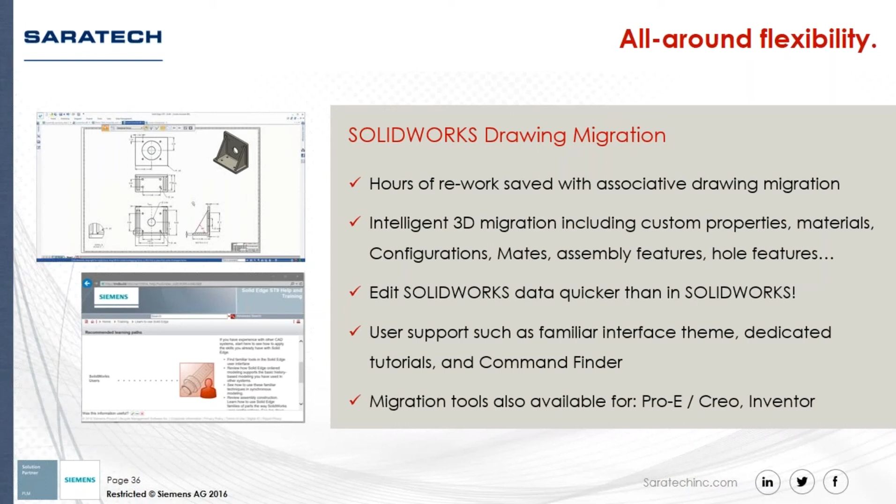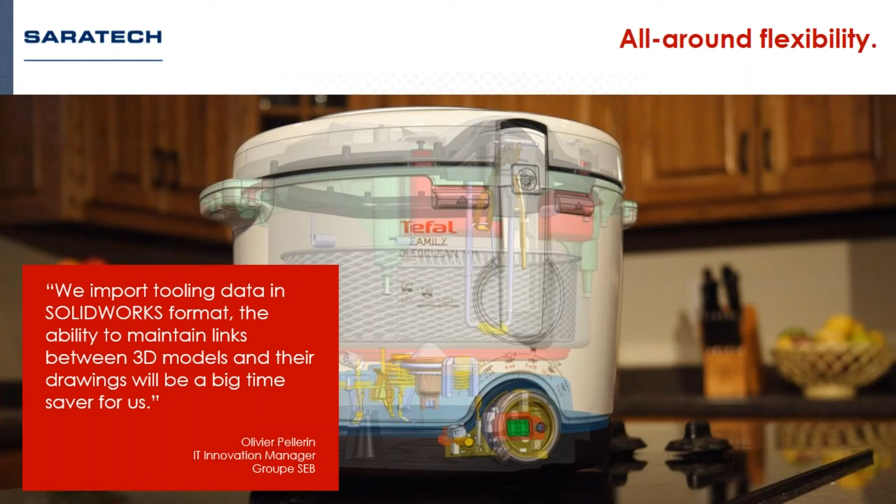There's also additional migration tools for Pro/E, Creo, and Inventor as well. Great feedback here from Groupe SEB, the name behind Krups, Tefal, and others—they really have the capability for importing their drawings and having them associated with those SolidWorks parts and assemblies.

Now, any of you have a Surface or another tablet? If you do and you haven't taken advantage of mobile CAD yet, you should definitely start with ST9. You can run full-blown Solid Edge on your Surface or another Windows tablet. It has advanced multi-touch finger gestures and stylus recognition, and there are viewer apps for most of the other mobile devices too. This is really amazing if you're on the road visiting a client or even on the shop floor—these really come in handy.

So that's Solid Edge ST9. Cloud capabilities when you need them—flexible and easy access to Solid Edge with cloud-based licensing if you want, along with those user preferences, software updates, and collaboration.

You can also get industry-leading modeling tools and forget about the constraints that traditional CAD has with synchronous technology. You can take advantage of built-in data management for instantaneous searches, easy revisions, easy release management, and optional cloud-based vaulting even. You can get up and running in just under an hour and have the flexibility to grow into full PLM with Teamcenter later on.

And with the best data migration tools and the most flexible licensing, it's never been easier to get going in Solid Edge, whether you're an established business, a startup, a student, or even new to CAD altogether. Now is the time to move to Solid Edge.